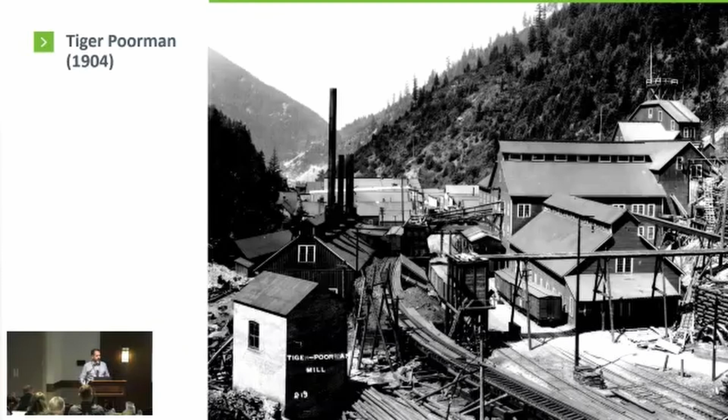We've heard folks talk about trusts in the past here, but those initial financial resources that were obtained as part of the settlement agreement, they didn't just go into the federal government. They went into a third-party trust who could manage and invest those funds, growing them into the long term and expanding the work capabilities of the trust. The initial settlement amount was for about $436 million, and those resources have continued to grow, expanding our work capabilities within the Bunker Hill Superfund site. So with that, I'm going to turn it over to Alan, and he's going to talk about Ninemile a little bit more.

Thank you, Kyle. So yeah, we're going to focus on Ninemile, which Kyle started out with there. In 2010, EPA prioritized this basin in the South Fork for work to start. It was one of the largest loaders in the upper basin, and it was also fairly unpopulated. So it was a nice spot to start, so we didn't have a lot of people around. And the yellow polygons here, those are mine and mill sites that were in the basin. There's about 18 of them. And then there's 6 miles of riparian that was also impacted.

And a lot of these mine and mill sites are hundreds of thousands of cubic yards of waste, with creeks and tributaries running through them, next to them and eroding them. And so constant metals going into the system. So when we started looking at developing the work plans to do work out here, we were looking at the data that existed for a lot of these sites, and there was little to no data.

Especially with soil. There were some infrequent water samples, but we really figured out that when we got out there, we're going to have to figure out nature and extent of the contaminants, understand the conceptual site models for all of these sites, how the impacts are moving through the system, and then how much waste was there. There were some estimates from the record of decision amendment, but we didn't know how accurate those were, especially with little to no data up there.

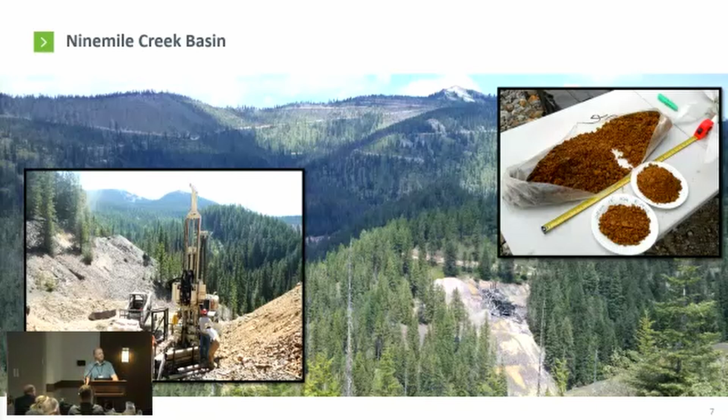So in 2011, 2012 is when we really started getting out there and getting data. I think to our surprise, there were sites that were cleaner than others and some that were dirtier. And it really made us think about this top to bottom approach. This is a picture of the Success Complex, a very productive mine in Ninemile. And we found this one to be about 50% of the metals load to the entire basin. And it was also used very heavily for recreational purposes.

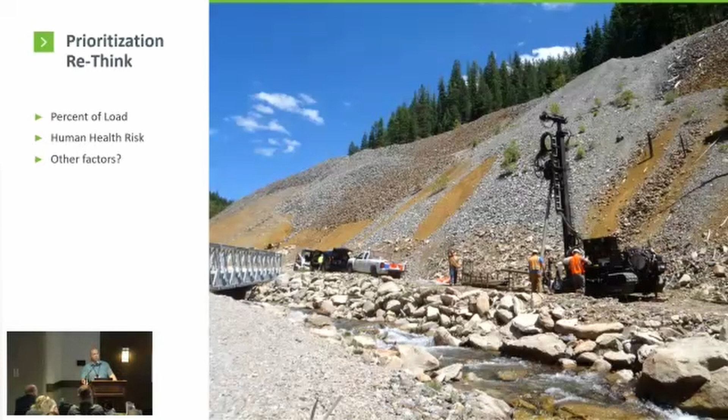So in consultation with EPA, the decision was made to actually leapfrog a few sites and get down here and clean this one up, since it was such a high risk and such a high loader. And once we started understanding that, we were adaptively managing every year, looking at the new data we were receiving and really thinking through prioritization and how we wanted to move through this. And so we developed some factors that allowed us to talk this through with EPA. I'll go through those real quick.

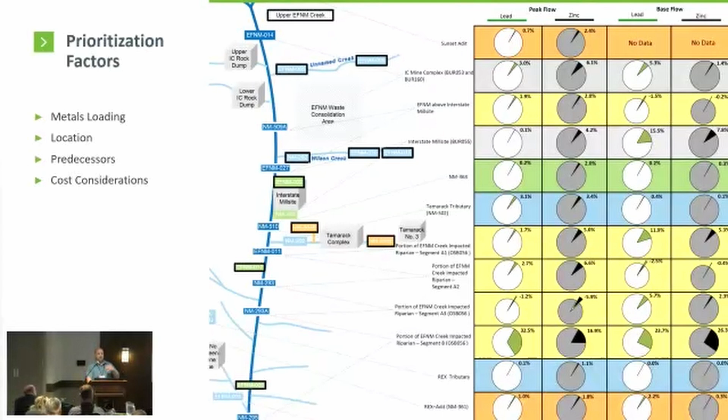The trust is operating on an annual budget, and we had to make sure that the amount of work we were going to do was going to fit within any given year. And then the last factors, human health, access to these sites. We really had to look at that. Were people recreating on these? Was it high use, low use? Were residents nearby? Ninemile was kind of easy, but as we get into other basins, it's a little more difficult.

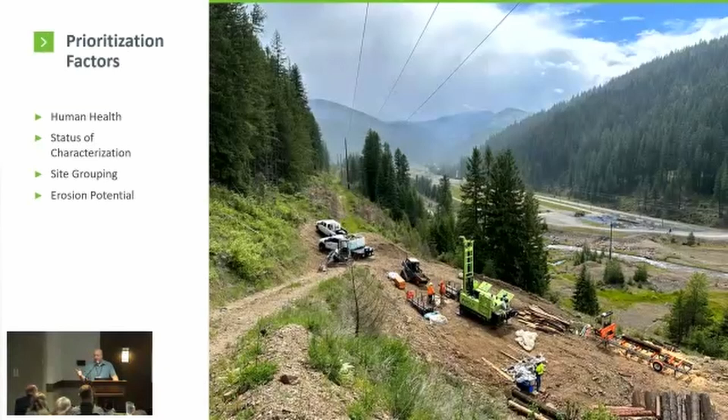Site grouping, if there's sites adjacent to one another, obviously there's efficiencies to be gained by doing them together. And then obviously erosion potential. So with all of those factors in mind, we started thinking about prioritization. So I'll turn it back to Kyle.

Musical chairs here.

Some of the things that we're thinking about beyond those individual prioritization factors are consistent workflow, right? On an annual basis, we want a little bit of investigation going on. We want a little bit of design. And we want the majority of our annual work budget to be spent on remedial action cleanup work.

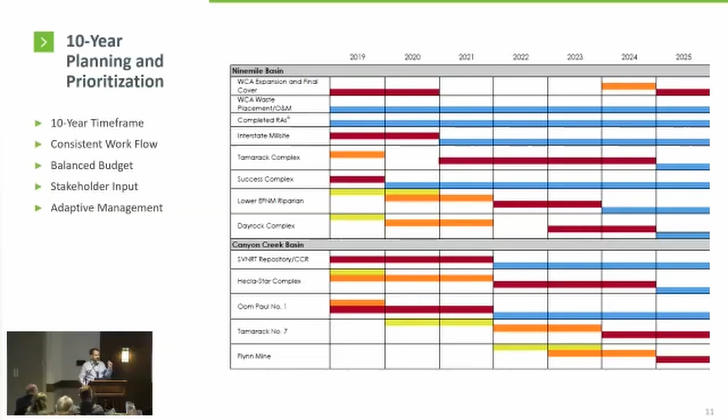Stakeholder input, something that I skipped over is EPA is the sole beneficiary of the Coeur d'Alene Trust. So they're involved closely with us in this process. Looking at a 10-year horizon allows us to get aligned with EPA on our short-term, mid-term, and long-term priorities. Where are we going to be working immediately? Where are we working in 5 years? And where's that taking us 10 years out?

And then finally, adaptive management. I don't mean to just use it as a buzzword, but this is not a set it and forget it process for us. We're constantly incorporating new information into this, whether it's information gained from our characterization projects or scope refinement, cost refinement. All of that's feeding into how we keep this consistent workflow moving and continue to complete projects.

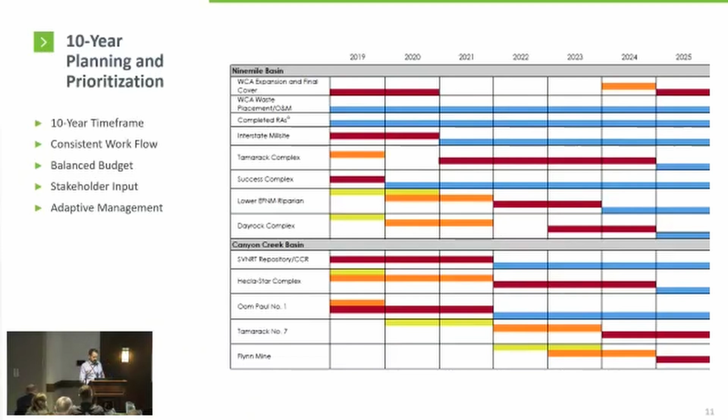So to wrap up the first part of this session, our work started in 2011 to begin our source site characterization. We utilized that data to inform our cleanup designs, but we also identified a need for a longer-term planning tool that we continue to use to this day, and that's our 10-year priorities. We also knew that there were limited areas of data collection, so our designs, both on the remedial action side as well as on the waste consolidation side, would need to be flexible as new information became available, and we needed to expand or change our waste consolidation needs. And Tausha Miller is going to talk us through how CDM helped us to navigate adaptive management of some waste consolidation area.

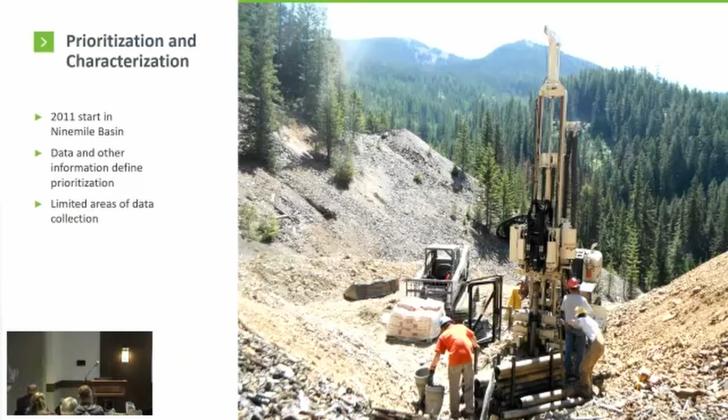Thank you, Kyle. As Kyle and Alan mentioned, my name is Tausha Miller. I am a project manager with CDM Smith out of our Kellogg, Idaho office. And I know we've got a 4-part session here, and I'm sure you guys are just itching to ask Alan and Kyle all sorts of questions about their first part. But if you can bear with us, hold until the very end when we're done with part 4, we'd be happy to answer all your questions.

So also, I know this is after lunch here and everyone is probably getting a little groggy and tired. So I have lots of photos in here to help keep you guys entertained. So bear with me.

So we've identified all of these kind of source sites in the Ninemile Basin, and we know that that's where we want to start. But with that, where do we go from here? So we have all these waste rock and tailings deposited high in that Ninemile Basin. What's our solution? What are we going to do with all of those piles?

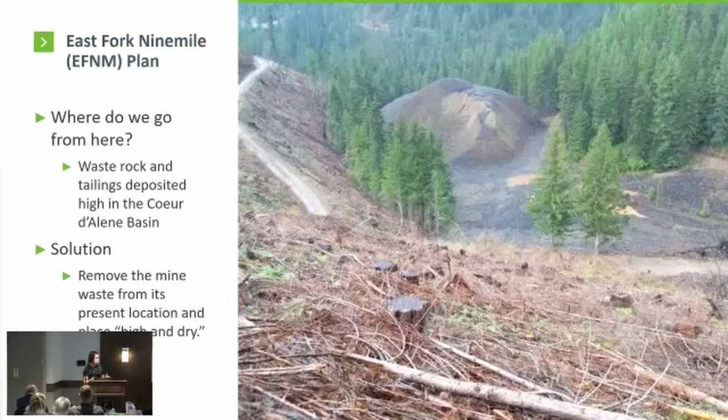And this is where the East Fork Ninemile waste consolidation area, or as we affectionately call it, the WCA, comes into play. So the solution is that we're going to pick up all of those source sites and we need to deposit it somewhere. And we know that generally the best solution to that is to place it high and dry, somewhat centrally located within this basin next to all these source sites.

So we've got our list of criteria here in order to select where that location needs to go. We know it needs to be close to all these source sites, as I mentioned. It needs to be large enough to contain all of the material, so we're looking at potentially 1 million to 3 million cubic yards of capacity. As Kyle mentioned, we need to be flexible with that design, and we need to make sure that whatever location we select, it's got ability to phase that site in.

Another bonus would be existing access roads. Is there anything present there so that we don't have to go and build new infrastructure? Also the potential for clean borrow materials. So that would be topsoil for covering not only the WCA, but at each individual RA site, as Tony's going to get into. And rock would be a bonus. So is there any sort of rock development area at a particular location, again, to fulfill that clean borrow source?

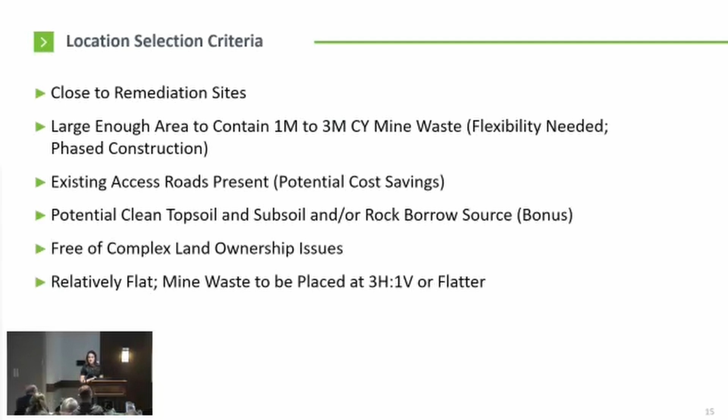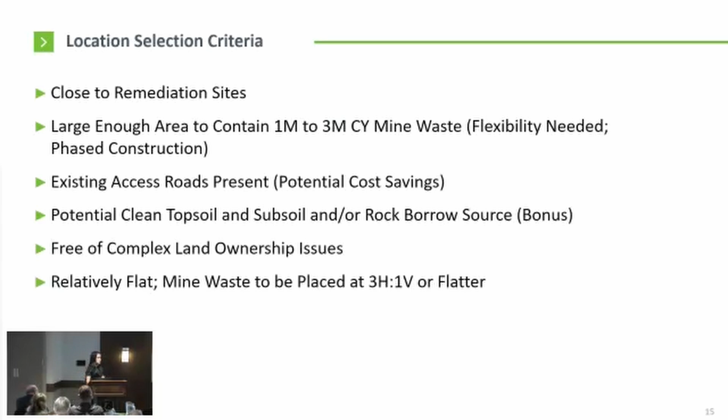We would also really like it to be free of complex land ownership issues. The last thing that we need is to come into a site that's got 10 or 12 different property owners that are really sensitive. So that's a criteria to keep in mind. And then we need it to be relatively flat. We've got a lot of waste that we need to stack in here. So if it's located alongside a mountain or several drainages, that's not going to be great. We need to place this waste at roughly a 3-to-1 slope. So this is all of our criteria.

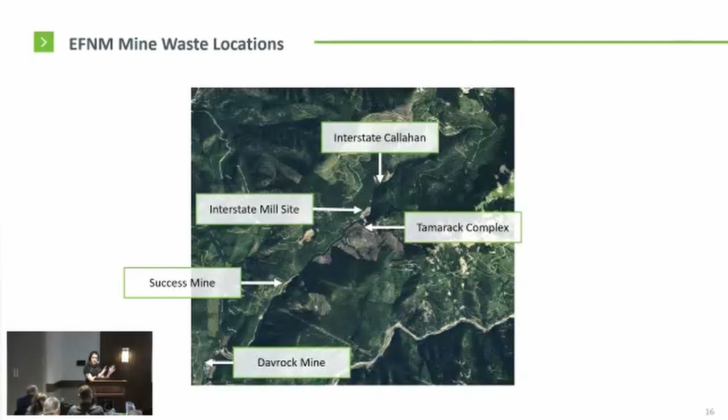And here's a little bit more of a zoomed in map of the Ninemile Basin and all of these particular source sites that we've identified. Tony's going to kind of talk about all of these, but here's 5 right off the bat. So we know we kind of generally need to be somewhere within this zone. So now that we've got our criteria, we need to go find the spot, right? So what are our best ways in order to go and find that spot?

So site selection tools. We started looking at LiDAR data that was available. Plain old Google Earth. Google Earth has great capabilities these days, so let's start there. And of course, the best thing that you can do to go and see if a site is feasible is get your boots on the ground. Let's go and do a site visit. So here's 3 kind of general photos from each of those different criteria of where we ultimately decided to select the spot for the WCA.

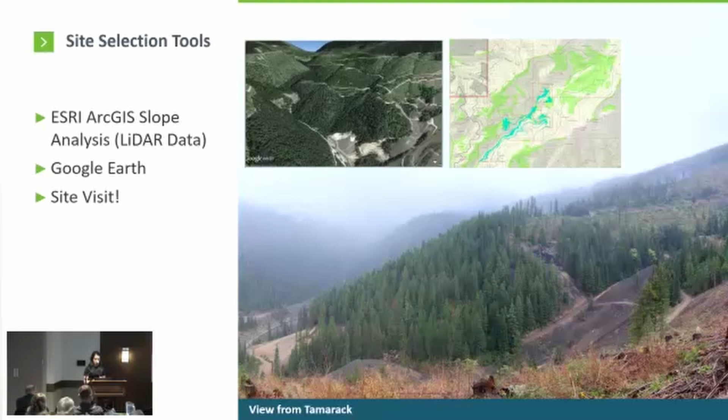So now we've got our spot, and this is just generally it on a topographic map here. Referring back to our site selection criteria, we found that there was a 1-owner property. It had an existing access road network to it. There's lots of old logging roads in the area, so we could build upon that existing infrastructure.

And right off to the left-hand side, you can kind of see a peak. We identified that that would be a great spot for a quarry. You could see bedrock kind of poking out amongst all the trees. Did some exploration and found that that would be a perfect rock source. And based on elevations and this topographic map here, we thought we could generally get about 400,000 yards of material out of that one peak.

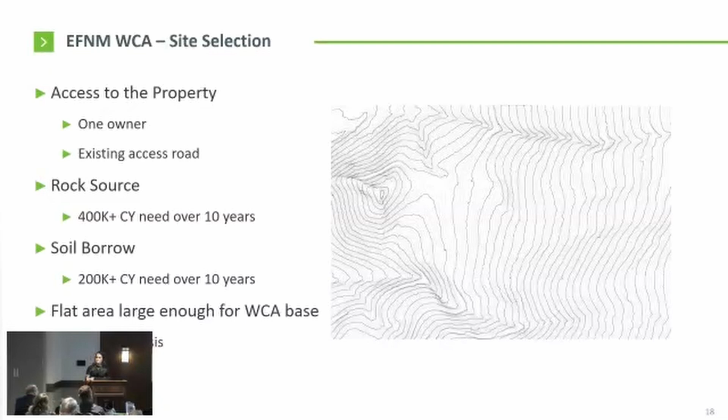And also we saw that this was relatively flat. It's got a large enough area right there in the middle as a good base to build upon. And we know in that base that we can borrow soil material as we strip that foundation and build upon it. We've got potential for 200,000 yards of soil.

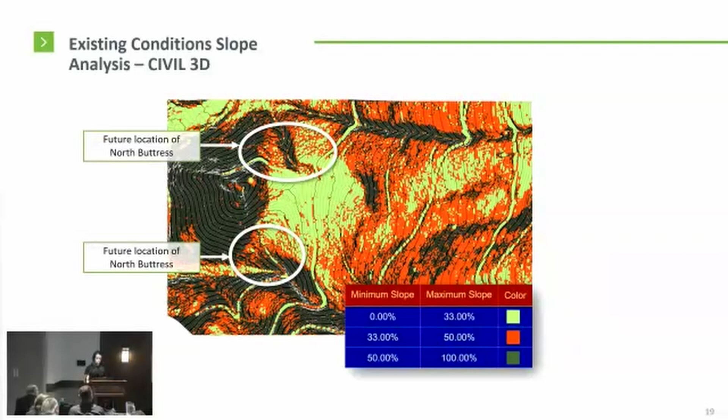And what we decided to do there was to build what we call our buttresses. They provided stability to these areas. And so we basically backfilled them and bolstered those two corners, again to maximize that footprint.

So in 2013, we got right into the design. And here is our conceptual design. We wanted to see, again, what we could do and how to maximize what our final configuration would look like. The two spots there in gray are buttresses, the north and the south buttress.

We dug a little further during the design, and again, we looked at that quarry, about 400,000 yards of material, but that area was expandable, and we could get more if we needed to. And the bonus was it's completely outside of where that waste footprint would need to be. So we're not sacrificing one thing for another. Soil salvage, we estimated roughly 250,000 yards we could pull out of there, and our final capacity for waste was approximately 1.3 million cubic yards.

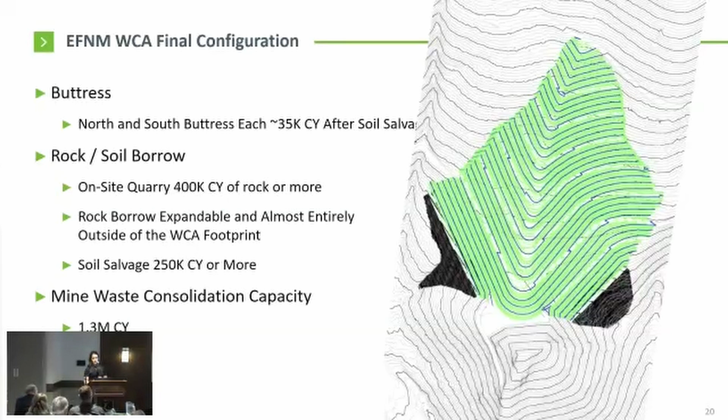Now we get into construction, the fun part. So I mentioned those buttresses, the north and the south buttress. This is where we needed to start. The photo here is of the north buttress, and you can kind of see some construction going on. The first thing that we needed to do was strip any topsoil. We built a drainage system down at the toe to make sure that we're not blocking any groundwater at the base. And then we backfilled.

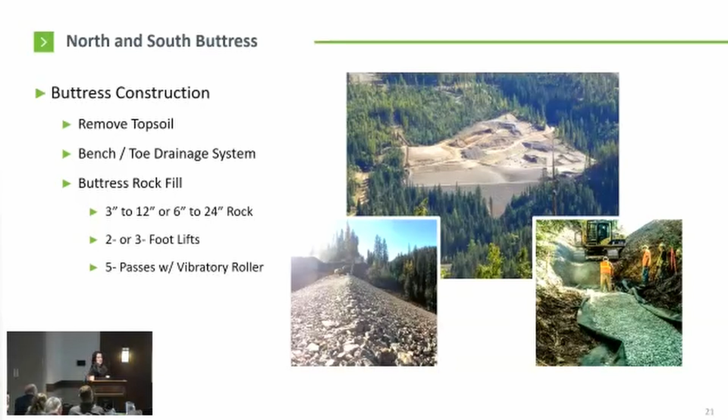We developed the quarry, which you'll see here in the next slide. That gave us about a 3 to 12 inch diameter rock or a 6 to 24 inch. And we placed that in 2 or 3 foot lifts and basically compacted the hell out of it. We took about 5 passes of a roller to get that in there nice and firm.

So here, as Kyle and Alan mentioned, phasing of the WCA is really important. These next couple of slides, I'm just going to talk through what that phasing looks like, starting after we built the buttresses through completion last year. Our first phase was the initial development from 2013 to 2015. After we built those buttresses, we did some topsoil stripping. We salvaged a bunch of that material, prepped the foundation, and built what we call our base drainage system.

The WCA does not utilize a bottom liner or a leachate collection system. The typical conceptual design that was identified in the ROD amendment allowed for some flexibility in what that bottom liner would look like. So we identified we could put in a 2-foot thick layer of rock that is about 1 to 3 inch diameter, open graded, that would allow any groundwater that could come up basically a flow path to get out.

The ultimate goal of this is to keep things dry. By placing that base drainage system underneath before we start placing waste, we minimize groundwater contact with any contaminated material. That base drainage system utilizes what we call monitoring pipe trenches and secondary drainage points.

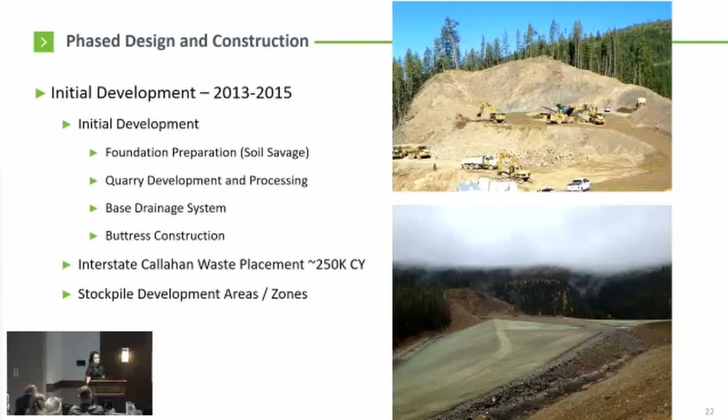So after the first 3 years of construction and waste was placed, we got into phase 2. So this is from 2016 to 2018, very similar to the first phase. We did the foundation prep, we installed base drainage system, we stripped soil, we developed the quarry even further. But what was really unique about this year was what we call our seep collection system.

So during that first year, we identified up on the hill as we were salvaging our soil and preparing our base that there was groundwater that was still daylighting. And we knew that, right, ultimate goal, keep this dry. We need to do something about that. So enter our seep collection system. So we dug an 8 to 10 foot trench, put a 6-inch perforated pipe in it, basically like a French drain, routed the water out, and took care of that groundwater seep.

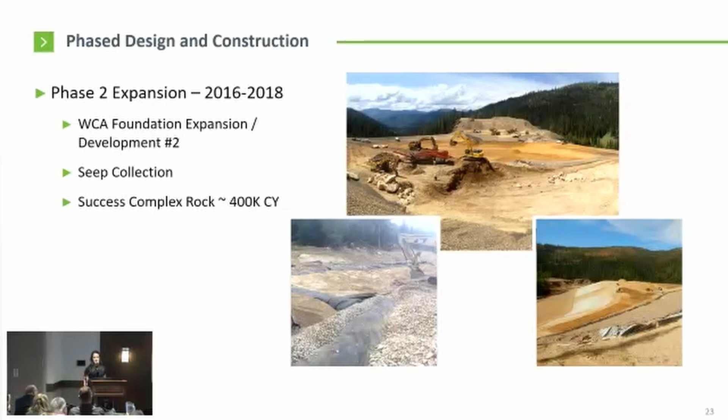And this theme actually kept continuing. We actually wound up chasing that same spot all the way through construction until about 2023. So we kind of identified the same seep and zone throughout the years, but as we developed, we needed to take care of it each time. So, seep collection system. For the waste that came here, we developed capacity for about 400,000 yards of material from the Success Complex, which was that first photo that you saw at the title slide. And that's this nice bright orange jig tailings that you can see in the top photo being placed.

All right, let's move on to phase 3. What was unique about this one from 2019 to 2020 is we start our first phase of the final cover. And so it had been about 5-6 years of waste placement at this point in time. Those monitoring pipes that I had mentioned, we're collecting this data, and we kind of started to see an uptick that got some people a little nervous, some people a little worried. So we reprioritized our implementation sequence and decided to bump up the first phase of cover installation by several years.

So in 2019, we installed our first phase of cover system, which was roughly 160,000 square feet. And this is our cover system profile you see here. So we've got all of our waste that's been placed compacted. On top of that, we have a 1 foot layer of a 1-inch minus screened waste rock. So each year, this layer has a double purpose. It's a winterization layer that we stabilize either with BFM or an acrylic copolymer. And so it acts as that component for winterization, but it's also a cushion for our geosynthetic components.

So that's the second layer as we're working from the bottom of this profile up. So there's a 12-inch layer there, and then we get into our geosynthetics. We start with a 10-ounce non-woven geotextile on the bottom. And then that is followed by a 60 mil LLDPE geomembrane. It's actually a specialty material.

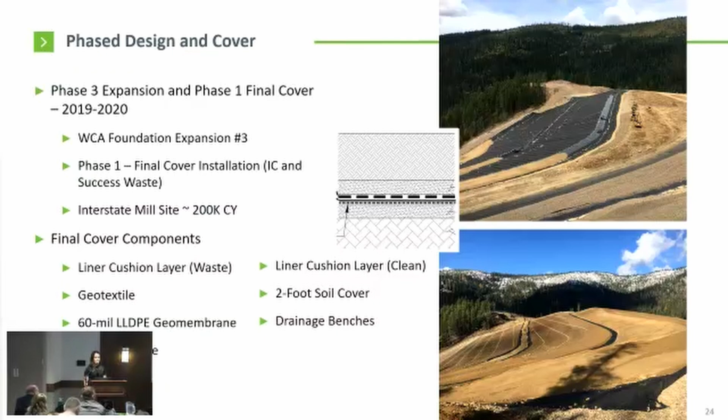So after our first phase of cover, now we're moving into 2021. We had a small year of waste placement. This was from the lower East Fork 9 Mile Creek. It was roughly 40,000 yards of material, a very small year in 2021. But that was really the start and the prep for the next 3 big years of 22, 23, and 24. And those years looked again as cover system installation.

So we got into phase 2, which was roughly 200,000 square feet. Same components as I just described on the prior slide. And then we did another expansion. And at this point in time, we're seeing that we're really close to the end. We've got about a year or 2 left of these sites to go clean up.

And as a team, as a Coeur d'Alene Trust team, we look at what's coming in each year. And so those waste placement plans are subject to change. As you're kind of refining and taking material out, it's never going to be what you thought it would, right? There's always changes. Expect the unexpected, as someone mentioned earlier.

So in 2023, we're getting close to the end, and there are 2 sites that are being remediated currently, and their projected waste volumes are going up. But our WCA did not have the capacity at the time to handle that material. So we had to go back to the drawing board quickly, figure out how can we expand this site one more time in order to allow for placement of those final materials.

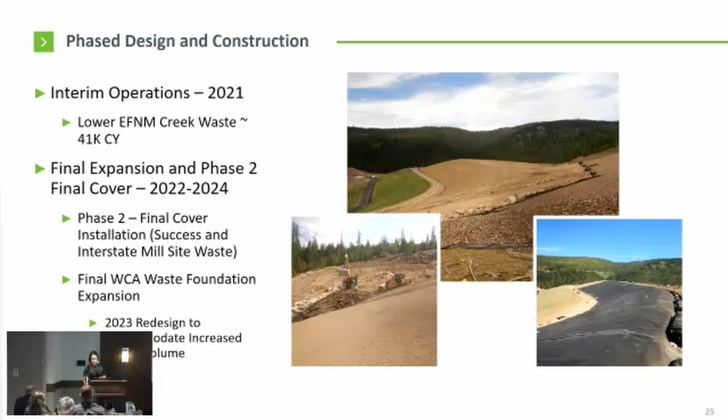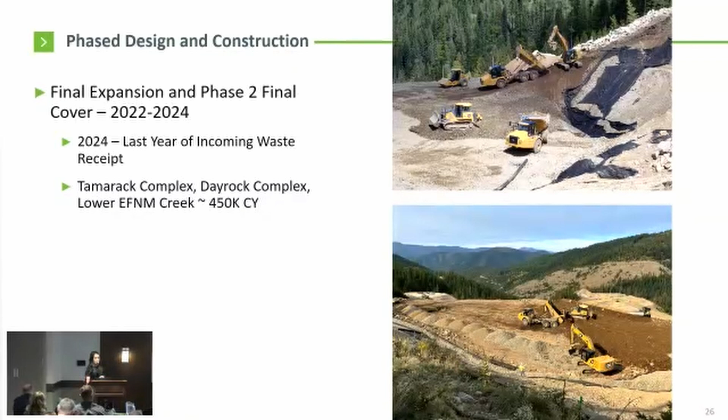Last year was our final year of incoming waste receipt at the WCA. It was a milestone year. We received close to 200,000 yards of material. And so this photo here at the bottom is one of those very final days of waste placement at the WCA. It was very near and dear to all of us after 12 years, 13 years of waste placement. This was a very critical milestone that we hit.

So the first phase, we were 160, second phase, just over 200. And now we are going to do the last and final phase in the next 2 years, roughly 580,000 square feet of material. So it's going to be a lot of work, but we're very, very excited about it.

And as we're doing the final cap and cover here, we're also going to go and close out all those stockpile areas I mentioned. So they're no longer going to be in need. We need to go and basically do a final regrade and cleanup of those stockpile areas as well as the quarry. So site completion should be anticipated at the end of next year, 2026.

So by the numbers, remember that 1.3 million cubic yard capacity that I mentioned at the very beginning? Well, our final waste number was 1,299,593 cubic yards of material. So we were right there, shy by about 400 yards.

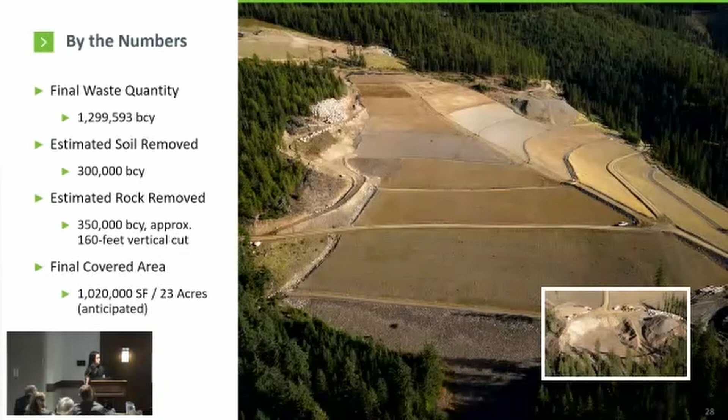We took about 300,000 yards of soil that was used for either the cover system here or for the RA sites. And out of the quarry, we took roughly 350,000 cubic yards of material. And just to give you a scale, we did about a 160-foot vertical cut from the top to the bottom of where it stands today. When we're done, we'll have about 23 acres of final cover over the WCA here.

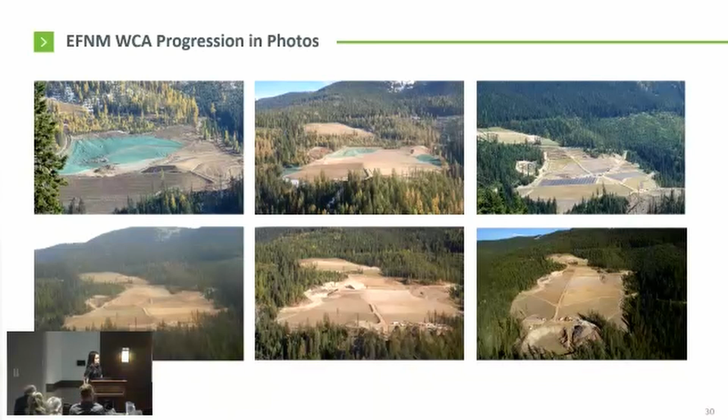Now, I'm sure we all do this, but it's really crucial each year that you go back to the drawing board and you say, where did we go right and where did we go wrong? What are our areas for improvement? We can always do better at something, and what are those areas? So the next couple slides, I'm just going to talk about some of those lessons that we have learned here individually for the WCA, but also for the Ninemile team as a whole.

On the planning side, that selection of the WCA provided a huge savings to the trust. It allowed for efficient placement from these RA sites because it was centrally located. It had an existing access road and infrastructure there, so we didn't need to come in and build anything new. That quarry was there and the ability to salvage all of that soil.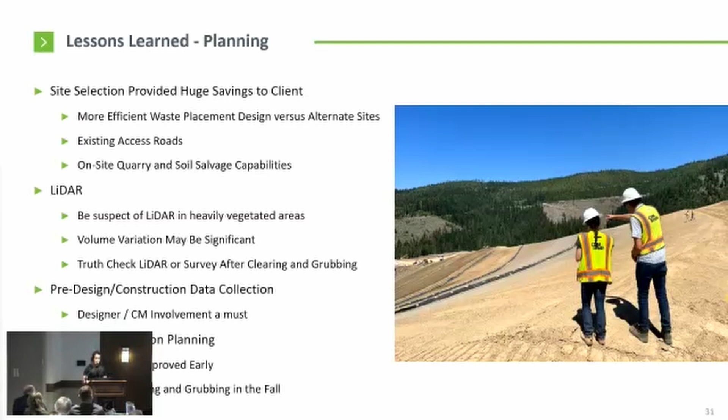One thing we learned was be suspect sometimes of LiDAR. It can be a valuable tool, but in heavily vegetated areas like North Idaho, it can result in some significant volume variances in those treed areas. So we have started to clear and grub trees the prior season, then get our surveys and build off that as our design surface, because you can see some fluctuations between what is actual ground and what LiDAR is giving you.

And then the pre-design and construction data collection, having the designer in the room with the trust as they're looking at these sites is crucial, so we know what's coming. And then planning for the construction seasons early, getting those designs approved years in advance, as Kyle kind of showed in that graph. We always want to be one step ahead of when construction is going to occur.

And then obviously clearing and grubbing, as I mentioned, performing that in the fall helps with not only the survey side, but also helps with bird nesting. So if we were to go and take out these trees in the spring and there's a migratory bird nest in there, we have to wait a certain amount of time in order to take those trees down. We don't want to do an incidental take.

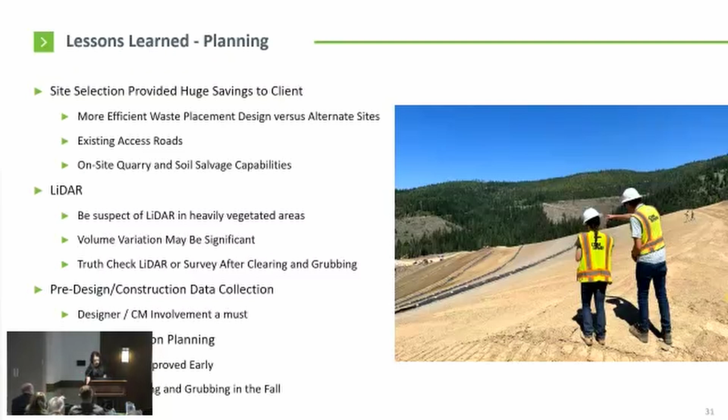Implementation. So some lessons learned on the construction side: that phasing of building the WCA saved some investment income for the trust. Cost is extremely important, so we need to make sure that we're not upfronting a bunch of costs early, and that we're doing that in an appropriate time frame. The quarrying rock and the salvaging of soil, using that quarry saved the trust over $10 million in trucking costs alone. So that was a huge benefit.

And then it also had another dual benefit of pollution reduction, right? We're not bringing in hundreds of trucks each day through a neighborhood, through residential areas, up the hill. You can just imagine what that trucking would take. So there was a dual benefit with that.

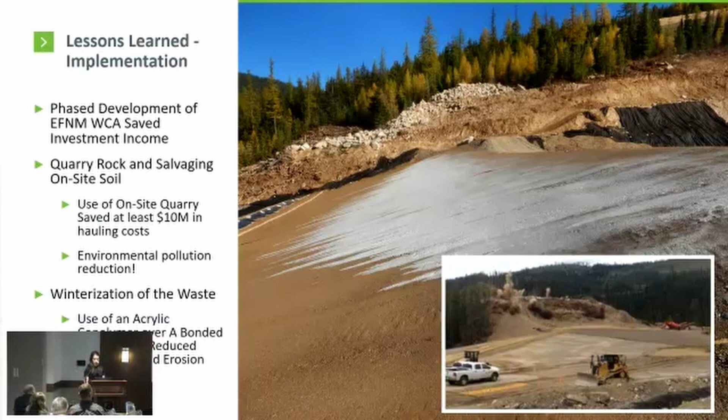And some last lessons here on the implementation side is the incoming waste volume and compaction. Updating these placement plans each year is crucial because compaction and shrinkage is really hard to estimate at these sites. So we may initially plan to receive 100,000 yards from a source site, but as it comes in, as we place it, as we compact that material, it could shrink down to a capacity of 80,000. But a different site might have a tenth of that reduction. So we don't know because these source sites, there's so much variation.

Not all waste material is the same. Sometimes we get a nice jig tailings type material like the Success, which was like a 1-inch minus. Or sometimes when we're working in the floodplain, we'll get wet soil that's not fully dry and that's kind of difficult to place, or we might get a bunch of riprap in there. And so there's such a fluctuation and variability in what we receive. And so not knowing, if you just have a flat assumption every year, your design and capacity for the WCA could be completely off.

So it was really crucial for us to work as a team, with Pioneer and Tony and his team, and with the trust to talk about this each year, and really work together for each of these sites, in order to make both areas basically what they need to be, and to get our cost benefit and to close them out appropriately. So coordination with the Ninemile team there, again, was really crucial. We started meeting monthly towards the end of the design to make sure that we're maximizing what's coming in.

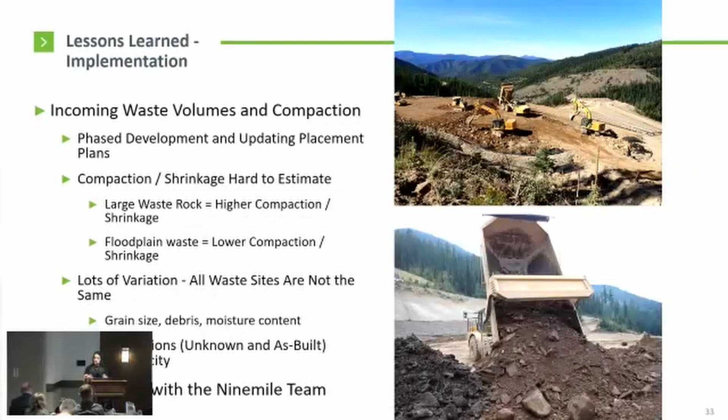And with that, I'll turn it over to the other half of the Ninemile team, Tony Wesche, to talk about those RA sites.

All right. Well, thanks, everybody. Happy to be here. I spoke, I must have been back in 2016 on the IC Rock Dump site, if you guys, the long-term people, have been here. Happy to be back to show you everything else we've been up to since that point.

So as it says there, I'm going to talk through the overview of the source site design and remediation construction elements. Not going to lie, there's not a lot of engineering details in this. There's just a lot of photos, because to get through all these sites in the time frame, pictures do 1,000 words. So get to it.

So as they've kind of mentioned, give you an idea where we're at in Idaho. Also the Google Earth map, each of the pins there is the different sites. As you run up through the valley there, got the WCA at the top end, IC Rock Dumps up to the left, and then Interstate Mill Site, Tamarack Complex, the Success, and then finally the Bayrock and Lower EFNM Creek. So those will be the 6 different sites I talk about today.

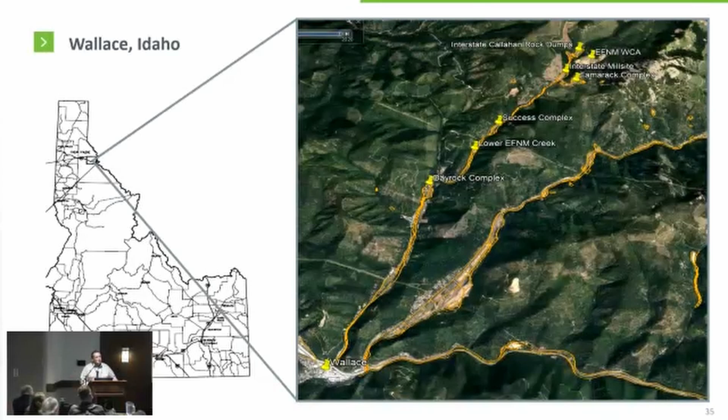We can't really start on the design without first talking about the basis for the designs. Each of these sites went through a 30, 60, 90, and 100% design effort. As you saw in Kyle's slides, 2-year design period to get through the EPA and the trust protocols there for the review periods that we need to get through. The main goals for each of these sites, each site may have had a separate basis of design, but trying to narrow it down to the ones that were kind of cross between all the sites.

We needed to achieve final soil concentrations on site of 530 to get our full removals completed. We needed to restore the native ground surfaces back to match the existing native conditions on site. We put a lot of emphasis on restoring the stream channels out there and the floodplains and riparian areas. Anybody who's ever done reclamation work, if you don't have nice green grass growing, you could do the greatest job in the world getting rid of the mine waste, but if you're not growing grass and the stream's not flowing, you're going to have a lot of questions to answer.

So as you'll see in the photos, we got rid of the waste, but we've also done a nice job, in my opinion, rebuilding the stream channels and getting the sites back grassed and treed and ready to watch them go for the next 50 years. We wanted to minimize the O&M requirements that the trust was on the hook for. The trust is on the hook for these sites into perpetuity.

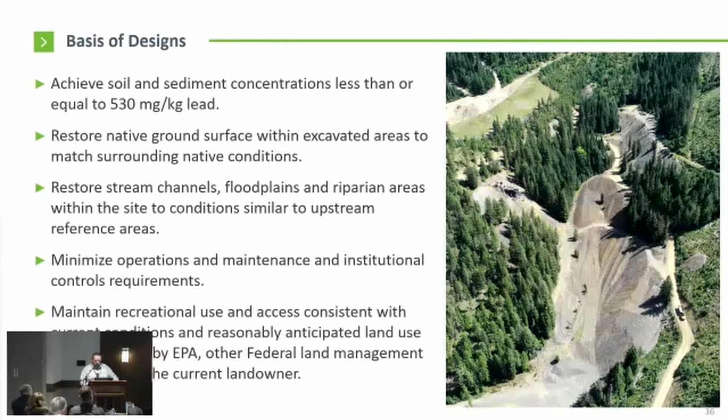A couple of the project and design constraints. We have a very short construction window in North Idaho. By the time the snow leaves in May to June, the sites dry out. We're lucky to work June through about mid-October. A couple of years we were able to go into November. A couple of years we were able to start a little bit early, but the guaranteed window is June through about October 15th.

We had very limited area on all these sites for the different construction activities and stockpiling of materials. When you're moving the amount of materials we were moving, your contractors are always wanting flat areas to work off of. We just didn't have a lot of those. So that was a huge design constraint, a huge project constraint.

Everything we were doing was on a steep slope, 1.5 to 1 or steeper. You start talking about putting dozers and how do you excavate waste on these slopes. Some of the ingenuity of our contractors to get the waste material moved out of there safely with 745 haul trucks, dozers, excavators, that kind of equipment. Pretty impressive what those guys were able to complete over the last 12, 13 years.

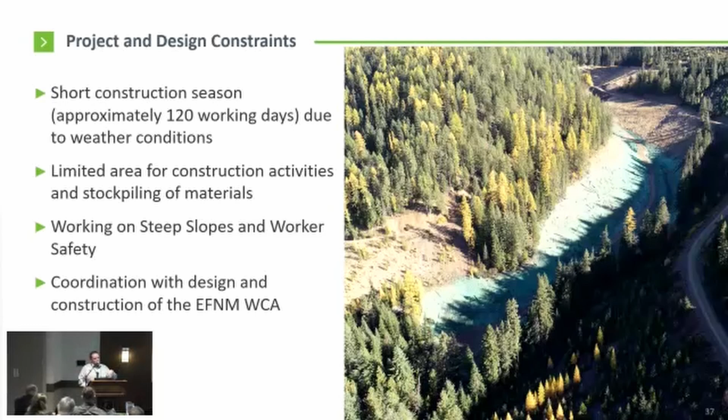And then also Tausha touched on it very heavily, but coordination between the design and the WCA, because the left hand's got to know what the right hand's doing, right? And so she needs to know what we were anticipating. We need to know what she's anticipating, whether it's waste stream coming in or whether it's us needing remediation soils leaving the WCA.

So the first site we'll talk about is the Interstate Callahan rock dumps. We did this work back in 2014, 2015. We give you guys just a few basic metrics on it. Original design volume was 221,000 yards. Final excavation was just under 216,000 yards. We ended up placing about 27,000 yards of general backfill back on the site, constructed about 1,700 feet of Lower EFNM Creek, or East Fork Ninemile Creek, and then total re-veg of 18 acres.

With each of the sites, the consistent theme is these 4 metrics that I'll present. I will say with the revegetation, every site got seeded with native seed mix. We broadcast seed everything. As I mentioned with the slopes, drill seeding was completely out of the question at these sites. So when you start thinking about revegging and walking these slopes, everything was broadcast seeded and then hydromulched behind it.

We did plant a mix of conifer trees at 200 plants per acre to kind of bring it back to its forest state. And all the trees we planted were just tubelings. One of the goals with the trust was to let the site kind of reclaim itself once it was there, give it the platform, let the trees come in on their own.

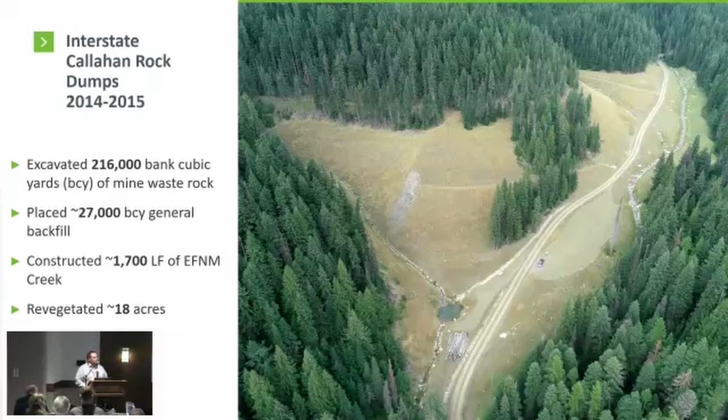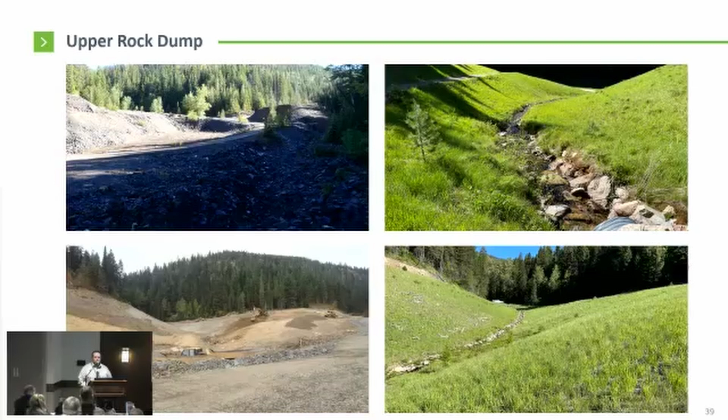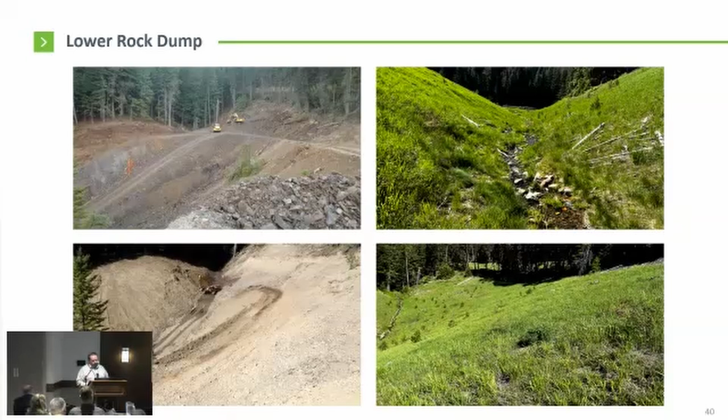As they're coming down through, you start to see more of the cover soil look to the site versus the waste rock look to the site. And then the two right photos: the top one's looking straight down towards EFNM Creek, down the drainage. And then the bottom right one is looking back up with the tributary off to the left there.

I'll talk a little more about EFNM Creek here. So we did a reference reach just above the Interstate Callahan here. The outcome from that was that it's a step pool system. It's a steep system. You're talking grades running 10% for these stream channels. So the idea being let the steps dissipate the energy, armor where you can to keep the bottom in place. You're not getting a bunch of head cutting back through.

And then we worked with the U.S. Forest Service with the different types of steps. So we wanted to provide a number of different hydraulic approaches to the steps. So we were using wood and rock. And then we had a couple different variations, whether they were a V formation or just a log or a rock structure across the creek.

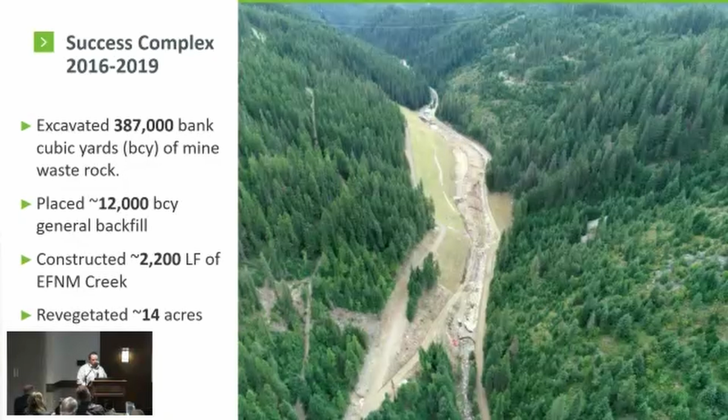And when you're running the stream on bedrock, there's just a lot of questions. What does this do for fish habitat? What does it do for the velocities within the stream? Is it acceptable to do that? Does it change the design, or do we need to bring the materials in to backfill the stream to make it work?

As we worked through those questions, we decided the bedrock gave us a great bottom to the stream, with the 10% grades we were dealing with. So we knew we weren't going to lose the stream to the bottom and see a bunch of head cutting. So then the question became, how do we build these banks so that we don't see a bunch of erosion on the bank, since it doesn't really have anywhere to cut within the middle to bring sediment into the system. We were worried about the banks getting eroded away as we went.

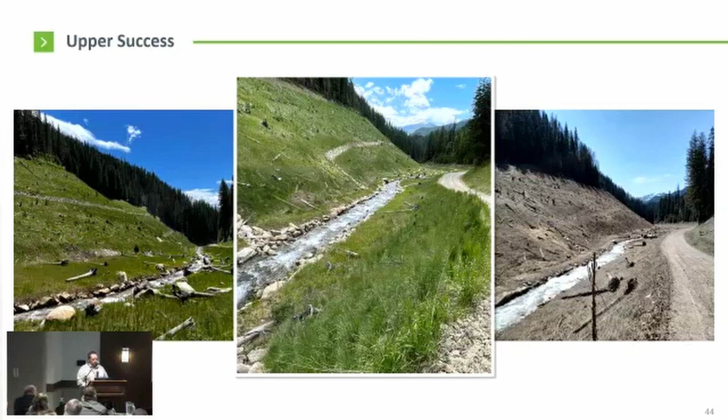All right, next site's the Interstate Mill site. 2017 and 2018 was the design work. We started construction in '19. So the last year of Success and the first year of the Interstate Mill site coincided. Running two projects became a common theme as the prioritization that MFA and the trust were doing took over to try to maximize the amount of dollars being spent each year. So running two projects concurrently, trying to get as much work done as we could with the money the trust had available. We excavated 174,000 yards of mine waste.

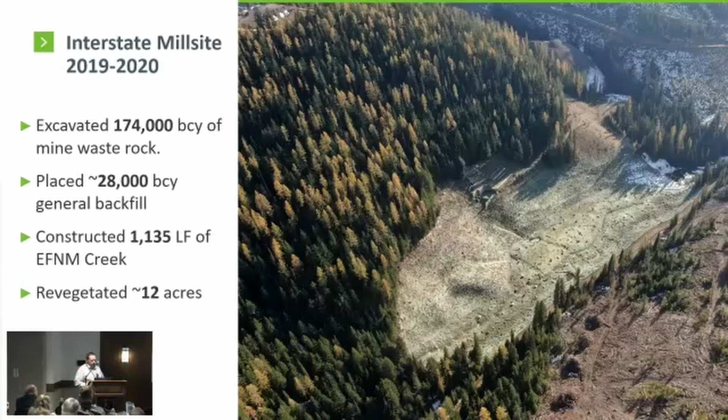We placed about 28,000 yards of backfill, constructed a little over 1,100 feet of EFNM creek, and overall revegetated 12 acres at the site. So these two pictures show it in progress. You can see the equipment in the right-hand photo working on top of the pile.

So what made this site interesting was the Silver Valley Natural Resource Trustees had come in before, back in the 90s. They had actually removed the waste. So where the pile's at in the center of the site, off to the left, there was waste spread across all that. They had consolidated it into one on-site repository, and then they capped it with a rock cap. And it was still causing issues within the stream. You can see where the stream's at in comparison.

So the decision was made to go in and do a full removal and take this material up to the WCA as well. You can see the benching in the photo on the left as the contractor worked their way down the hillside to get everything removed. You can see BMPs. BMPs were a big thing along the creek; everywhere we went on these projects, you better have your BMPs in place. We had enough issues with rain and everything else up there. We didn't need to be getting ourselves in trouble by not having our BMPs in place.

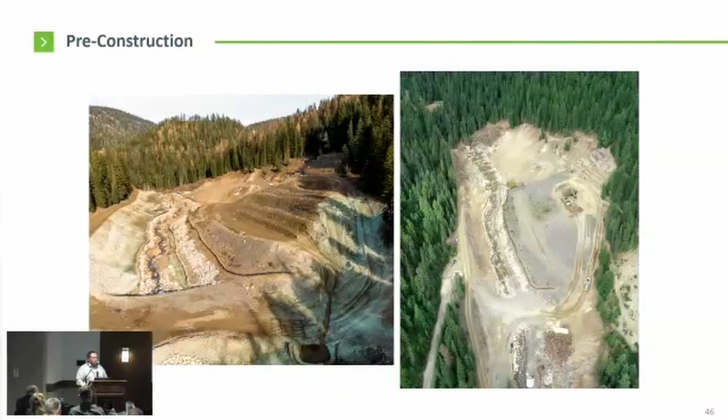So as you move to that site post remediation, you can see the same foundations there on the right-hand side. Those foundations were considered historic, so we left them in place, excavated everything out that we could, and then backfilled around them. We do have a couple little stormwater channels, as you can see, coming down off the hillside there where we encountered seeps during construction.

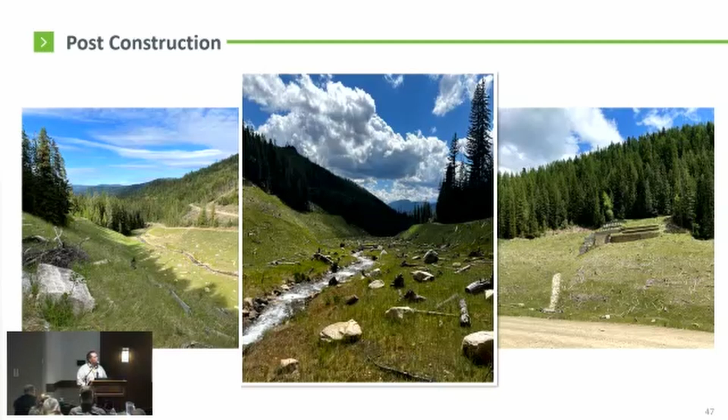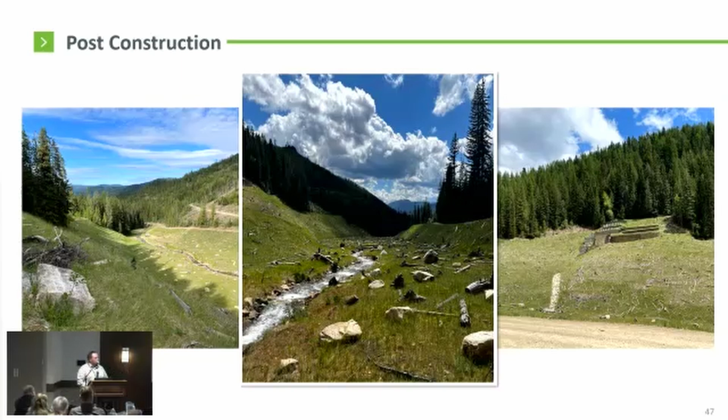The interesting part, the Interstate Mill site was a site where, on the top end of the site, from a stream standpoint, it was still running that 8 to 10% grade, but as we got to the bottom, it really flattened off. It got down into that 3% range. So as we started looking at it in construction, with the way the excavation finalized out, it made sense to keep the drops in, but we were able to really space those out during construction and get more run and more riffle in there versus just having to stack structures.

Moving on to the Tamarack complex. So this was the biggest of the sites as far as the waste removal goes. We moved 413,000 yards off this site. I think original design was 390,000 yards. This was an interesting one because it wasn't necessarily EFNM Creek floodplain that caused us the issue. It was the tributary.

So what you can't see in this photo on the right is that the whole tributary is running subsurface. And through investigation, it's really hard to probe and drill in the exact right spot to hit the bottom of these very steep, very narrow channels. So if you drill just a little bit off and you're not hitting the center, that's going to throw your design off. And so what we found was we missed it by about 15 feet probably, and it resulted in about 20 extra feet vertically that we had to go down to get waste out. So we did pick up some extra waste through there.

Another interesting tidbit is the pile that you see in the bottom left of that photo was known as the haystack pile to all of us. As we excavated that out over the 3 years, when we got down to the bottom of it, we actually found ice, which was an interesting one. We were a little perplexed. The contractor was definitely a little perplexed. So they had to dig it and then let it melt and then dig it and let it melt. Just something we hadn't really encountered up there before.

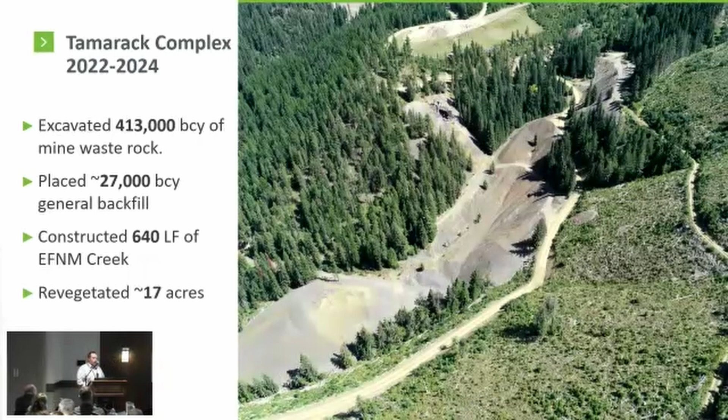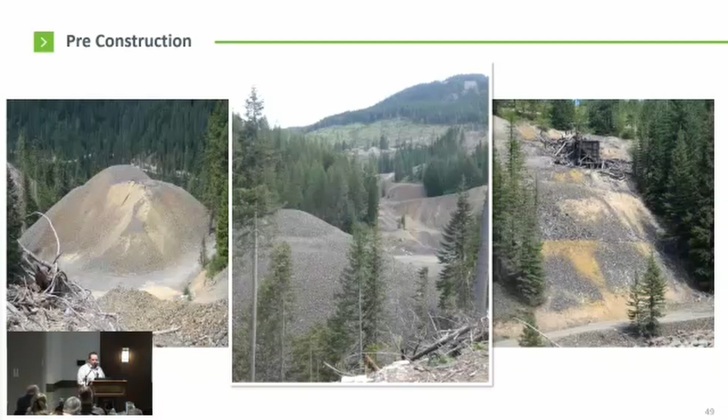So there's a good look at the haystack pile on the left, and then a good shot in the middle, just looking up the draw. None of these really give you an idea how steep this canyon really is through there. The old mill site building is on the right. We did remove the lumber off of that, but left the concrete foundation, as you'll see in the next couple photos.

So EFNM Creek in the left, this is where the tributary from the canyon up above comes down and ties in with EFNM Creek. So we were able to create that confluence as it exited the canyon. And then we do have a couple drone shots on the right there, trying to show you guys the best we can. This drainage is really hard to photo in a good angle just because it does kind of snake through there a little bit, but the drone photos are about the best way to get it.

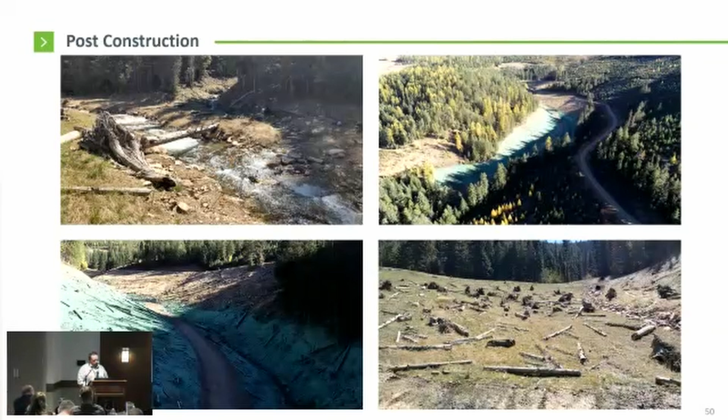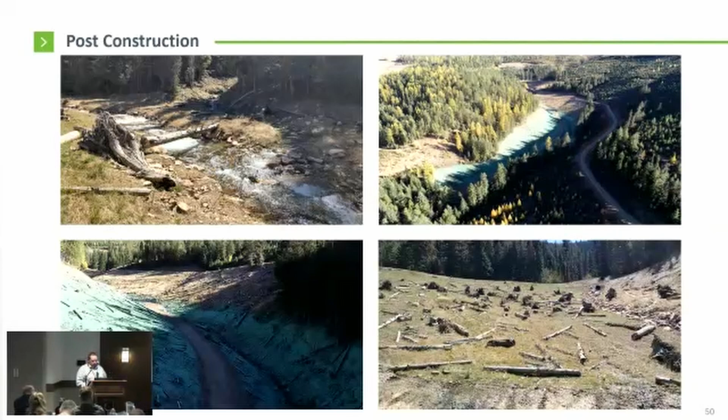And then bottom left, the shadow doesn't do me much justice, but you can see just kind of how steep the bottom of that drainage really is, and kind of understand what I was talking about with the V part of the drainage and how the waste volumes can really adjust on you. And then the bottom right is an area up by what we've referred to as loggers camp over the last 4 or 5 years. It's just a flat area that the landowner really likes to camp and do whatever up there. So we're able to kind of give that back for him and still get our objectives complete.

Overall, we excavated 375,000 yards of waste rock from this site, 130,000 yards of backfill. This was a big one for the creek. We had just about 9,000 feet of creek, and it wasn't just EFNM Creek, I should tell you guys that. This was Ninemile, EFNM Creek, and the West Fork of Ninemile. This is down where the 3 converged, where the West Fork and the East Fork came together, just in the top end of this photo, you can see.

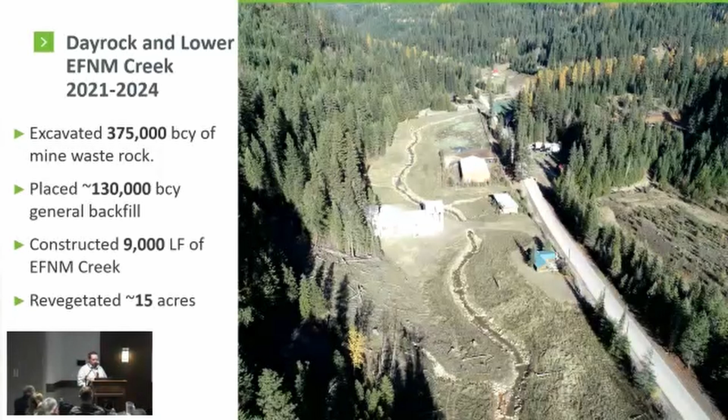The other thing that made the Bayrock a little more interesting was it had a lot of buildings on it, as you'll see on the next slide. But the buildings you see here are post-construction. One of the interesting facts is that white building on the left, the stream actually in its existing state ran underneath it. They just built the building over top the creek, and that's just where it ran. So in design, we were able to move it out from underneath that and give the landowner a good spot to move their equipment around on site.

So looking at it existing, you can see the big, bare areas of waste rock sitting on site. There's a good look in the middle of all the different buildings we had to contend with, most of which, with the exception of the big mill building and then the shed up on the right and the old lab building, the rest of them were all taken down as part of construction on this site.

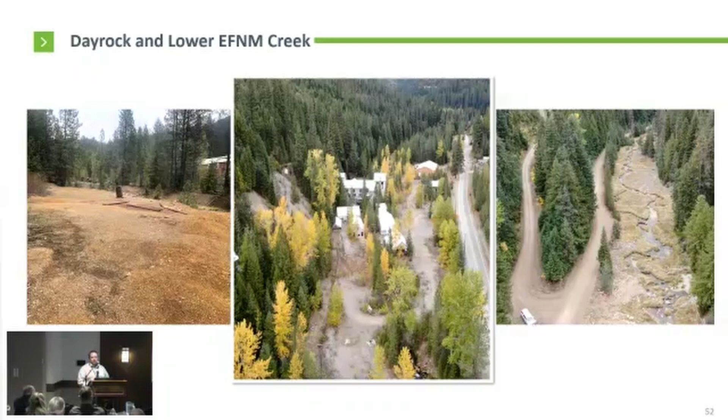So starting to get into a little bit more of the infrastructure, up at the head end, we didn't have a lot. It was just blow and go, get the waste out, start hauling it. Here we started to run into more of the infrastructure. Right off, the pavement on the right there in the middle photo, you can see Ninemile Creek Road, paved road, lots of people on it. So we started to get into more traffic control, stuff like that. And then once we were back off the pavement in the photo on the right, looking at Lower EFNM Creek, closer down in the valley, but still just right there with the public. And so having to take a lot more precautions with the public being right there.

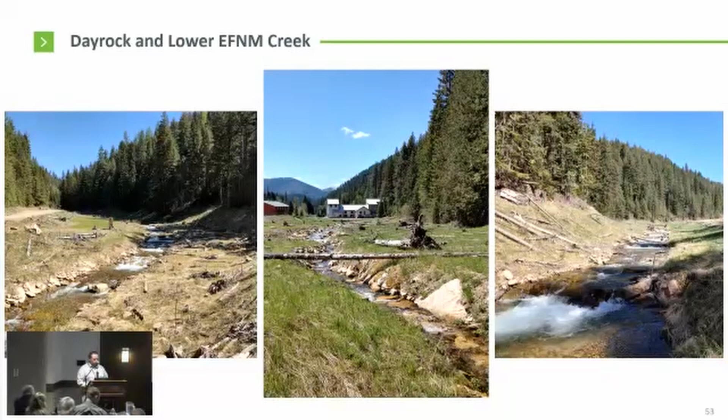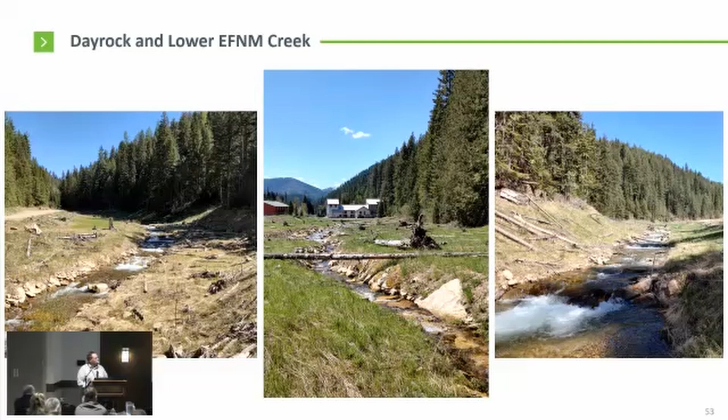Few photos here of everything once it's complete. The photo on the left is the Lower EFNM project, a couple years after construction. These are a little more recent, so the grasses are growing well, the plantings and stuff like that are still starting to establish and come in, but they're there. The middle photo, you can see the mill building from the Bayrock, down there in the middle of the site and the creek running right down towards it. And then another good photo of the creek with a drop structure, and kind of a set of structures through there that you can see as we work our way out of the site here.

So to give you guys kind of the overall look, I know Tausha put the number up there of 1.299 million yards. To give you guys an idea, on our account, we hauled 1.565 million yards. That compacted down to that 1.3 million that she referenced. Overall, we hauled 224,000 yards of general backfill to complete the sites.

We rebuilt almost 15,000 feet of creek, whether it be EFNM Creek or West Fork or Ninemile Creek, and then overall revegetated 76 acres total within the canyon or the basin. I'll give you guys just a few lessons learned from all the years up Ninemile.

Big one, flexible designs. If you're going to go into a mine waste excavation design, you better be ready to adjust on the fly, especially if you're going to want them to keep digging the waste out. Because everything from the creek to the road systems to the stormwater channels, as soon as that waste excavation's surface changes, all of those are going to change on the back end.

So have it in mind early on how you're going to adjust designs if things start to go a little deeper with the waste excavation or a little bit shallower, how it's going to change your grades, what your stream design changes to, how you're going to build that stuff. So having flexible designs, being able to adjust, kind of run on the fly a little bit.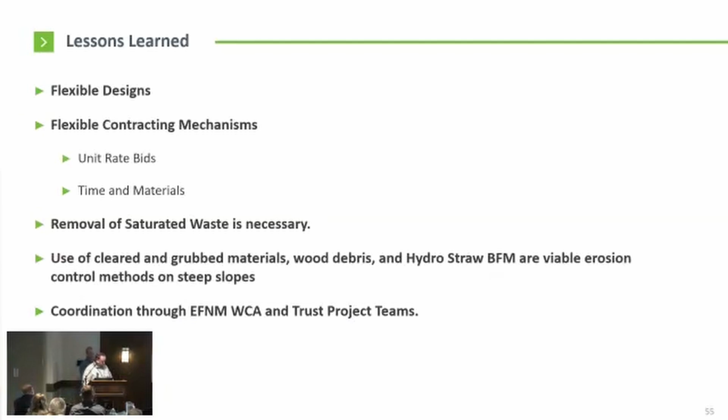And I promise we're almost there. Thank you guys for putting up with this. I know it's a lot after we didn't quite get the breaks we anticipated. So we've got about 10 minutes left here.

There's 4 of the sites where, as we started investigating them, we found out that 3 of them were contaminated, 1 wasn't, but they didn't have very good access. People weren't using them, they weren't eroding much, and they weren't loading much. And the trust will probably not have enough money to do everything in Bunker Hill. So because they weren't having those effects, we considered them lower priority, and we're pausing on those for now as we complete the highest priority sites here.

And so to allow the trust to move into other basins and work on higher priority sites in other basins. Once we complete all the higher priority sites, then we'll come back and say, okay, how did this recover? How's it doing? And which of the lower priority sites should the trust focus efforts on?

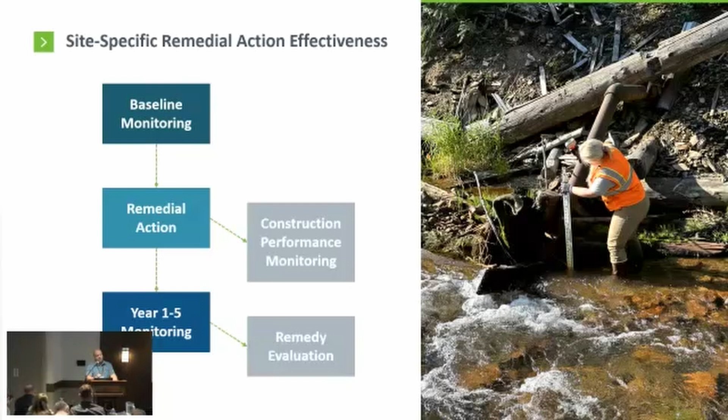And then the site specific, we do that for every one of the sites that we complete. We're looking at surface water and sediment and soil at those sites for at least 5 years to see how they go. So this is a basic schematic here. Establishing baseline, super important. You want to make sure that you have statistically significant data within your surface water so you can compare that post-construction. And so then you have your remedial action. You can have two parts of the monitoring: the construction performance monitoring and remedy evaluation.

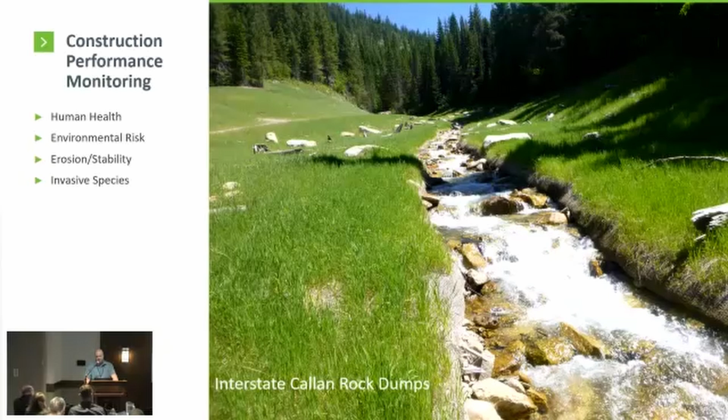And so the construction performance monitoring is your typical O&M, making sure the site is stable, you don't have large erosion going on, your vegetation has established, you're taking care of invasive species. If you do have any residual contamination left, that cap is in place and your human health and environmental risk is managed. This is scheduled for 30 years. And I would say typically within 3 to 5 years, we don't have any major issues. It's mainly getting out there and spraying weeds so far. And so far, very successful.

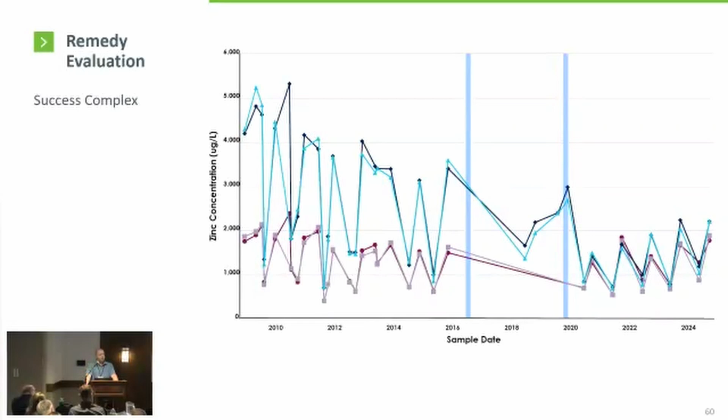And then post-construction, you can see that those two lines have married up and they're almost on top of each other, showing that the concentration loading from that source is almost nil. And we do still have, as Tony mentioned, an adit there that was a pretty large point source loader at that site. So we're doing this type of evaluation, including sediment and soil if necessary, every 4 or 5 years at a minimum.

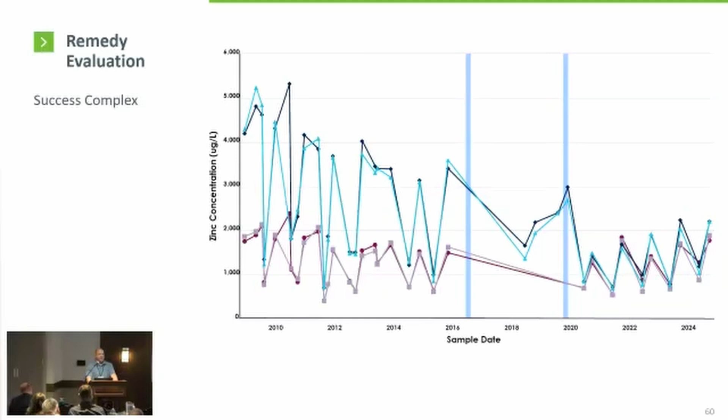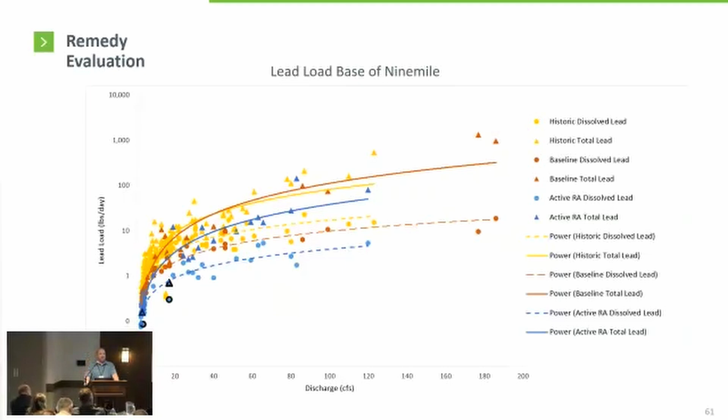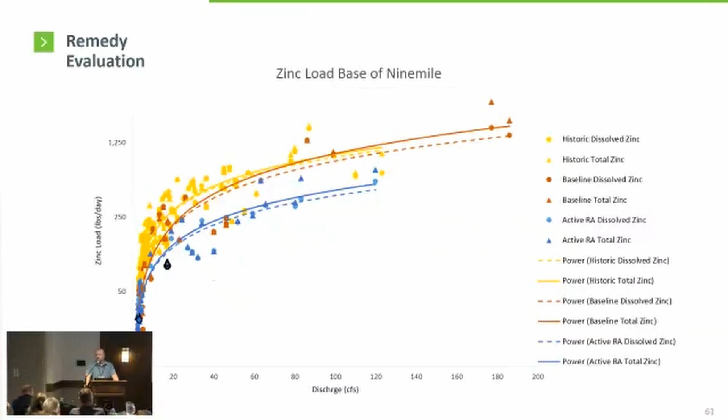So you can see that the blue line during construction, we've actually already seen decreases in the lead loading at the base of Ninemile. And then similar for zinc. We continue to see that trend of reduction in concentration of zinc at the base of Ninemile. So we'll be starting area-wide this year. We'll do that for 5 years, and the latter part of that will also include some biological monitoring. With that, Kyle, last couple slides.

3 more minutes, I promise.

So beyond Ninemile Basin, the trust has been working in other areas of the Superfund site for the last 15 years. But where are we headed next? In the upper basin, we're going to focus our work over in what's known as Canyon Creek. This is actually just one drainage to the east of where we just spent the last hour and a half talking about in Ninemile. Canyon Creek represents a significant loading source to the South Fork Coeur d'Alene River. Alan shared his little schematic of the matrix showing all of the different source sites in Ninemile there. You can note in Canyon Creek, there's over double the amount of source sites. So we're going to be heavily invested in Canyon Creek for about the next 10 years.

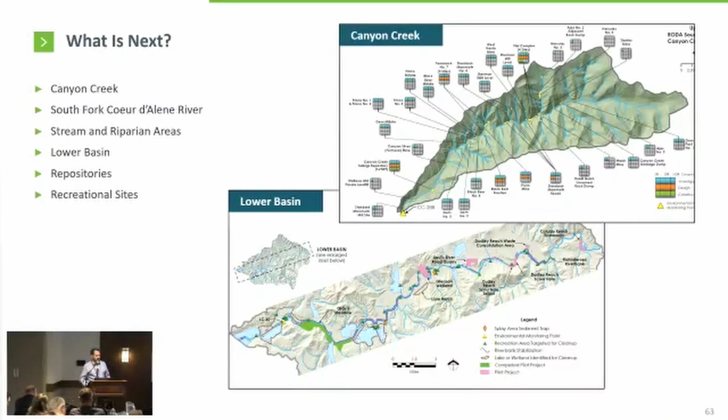Repositories, for those of you that do this work, we talked about waste consolidation areas. As we look ahead to future work, we've got repositories that we operate and maintain right now. That 10-year prioritization tool that we talked about, understanding our workflow and sequencing and where we're heading, we'll be planning and putting the pieces in place for additional repositories to handle our long-term waste management needs on the Superfund site. And then finally, human health on Bunker Hill continues to be of utmost priority. Recreational use in the area continues to expand, primarily in the lower basin. So addressing recreational exposure risks throughout the lower basin will be a priority for the trust and EPA for many years to come. We're almost there.

To wrap this all up, from where we started, it's difficult to have a clear path at the outset, but we use the information that we gained throughout years of investigation and design and construction, incorporating those lessons learned into our planning processes to adapt and address our highest priority areas. It's important that we document that process. We're documenting that through our prioritization process, as well as taking our lessons learned through our effectiveness and applying those to future remedial action work. We talked about teamwork here. It takes everybody pulling in the same direction. There's a lot of people that you didn't hear from today that are important to this work.

Jim Finley and Ian St. John with the Coeur d'Alene Trust are here today. They're critical members of our team that have been a big part of the success and ongoing work on Bunker Hill. The trustee of the Coeur d'Alene Trust is the Coeur d'Alene Environmental Company, presided by Roberto Puga. Without the support and leadership and financial management from that trustee side, the Coeur d'Alene Trust also doesn't exist. And then finally, our beneficiary over at EPA and all the remedial project managers that we work with to tackle these challenging projects. And that's it. We'll take questions now.